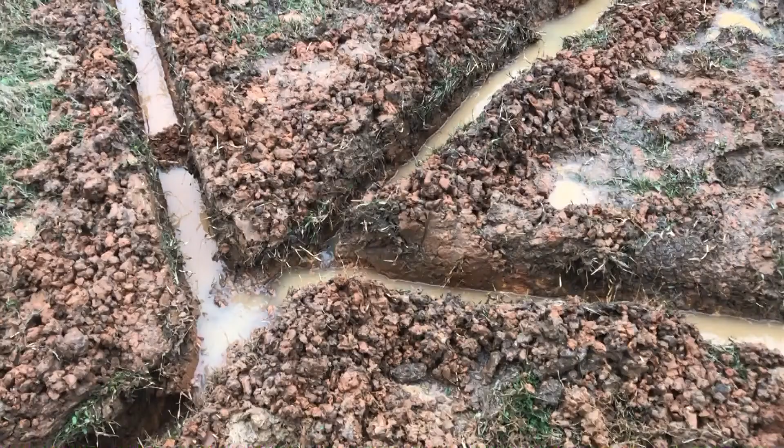Well, it's still raining. You see the water in there now? So the French drain is actually working.

Hey, welcome back to Page DIY. This is the second video in my series of 4 on water remediation, how to keep water out of your house, and how to move the water to where it belongs.

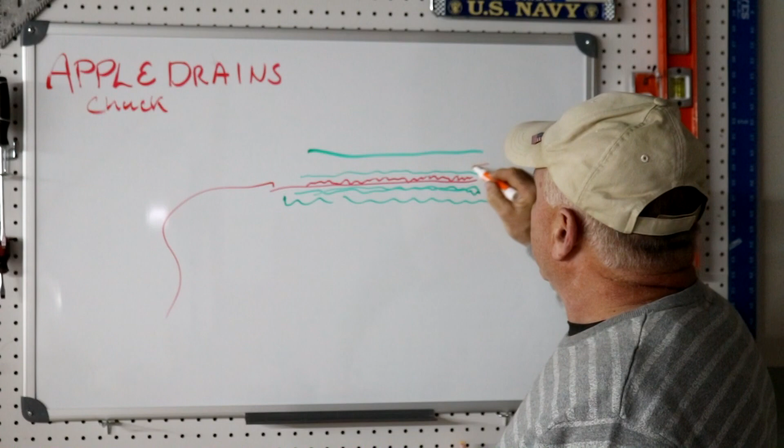In the video I struggle with trying to figure out what it's made of. I looked it up. It's not PVC, it's not ABS, even though it's black. It's PE, polyethylene. And this pipe has holes in it. So water comes up through the gravel and into the holes on the bottom of this pipe.

This pipe will be marked. And you want to make sure that the marking, a green or a blue line, is facing up. And that'll put the holes in this corrugated pipe that are designed to collect this groundwater on the bottom of the trench on that bed of gravel. It's starting to look pretty complicated, but I assure you it's not.

So after you put the gravel in, you put the pipe in, you can cover the trench back up. You want some gravel around the sides of the pipe, because most of the pipes I've found had holes on the sides as well. Now you might say, how does it work if it's got holes in the pipe? We're working on this hydraulic pressure, the groundwater coming up into this thing.

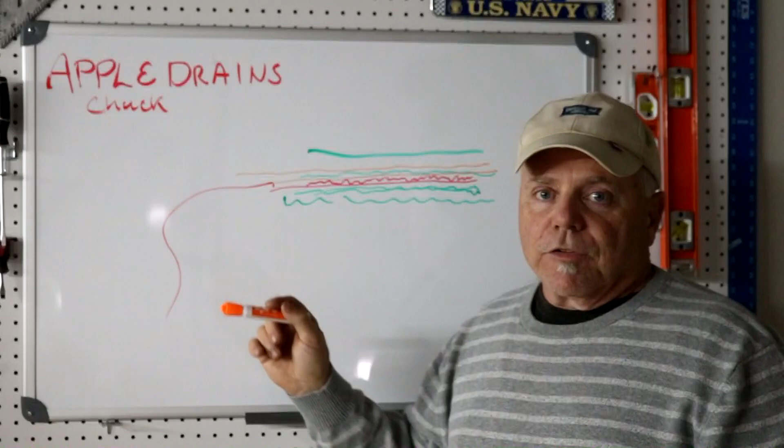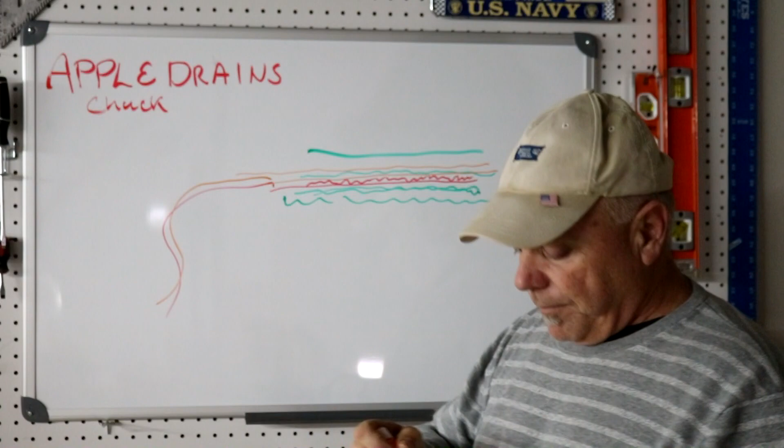It wants to take the path of least resistance, and we're going to offer it that in this nice trench, through the gravel, into the pipe, and from there out to wherever you're going to drain it. But that is the basics of a French drain. Let me recap.

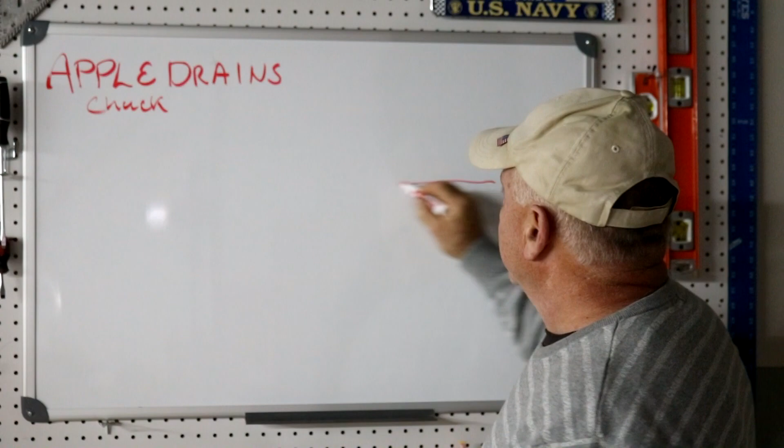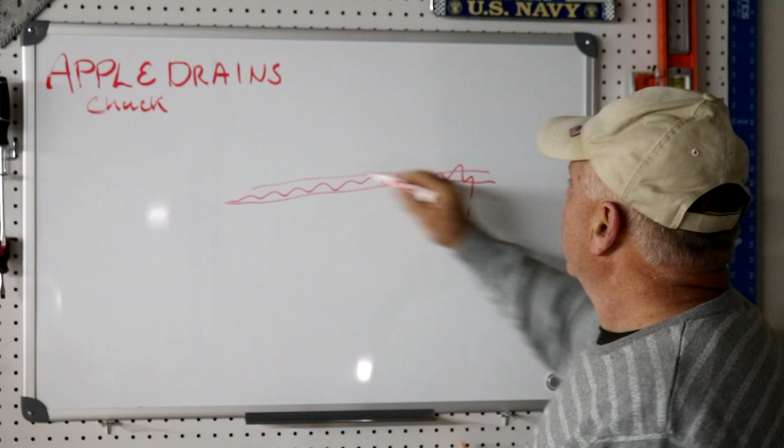Dig a trench that's graded off to the direction you want to run the water. Groundwater comes up into it, on the bed of gravel into the corrugated pipe, and runs away. It's all gravity fed.

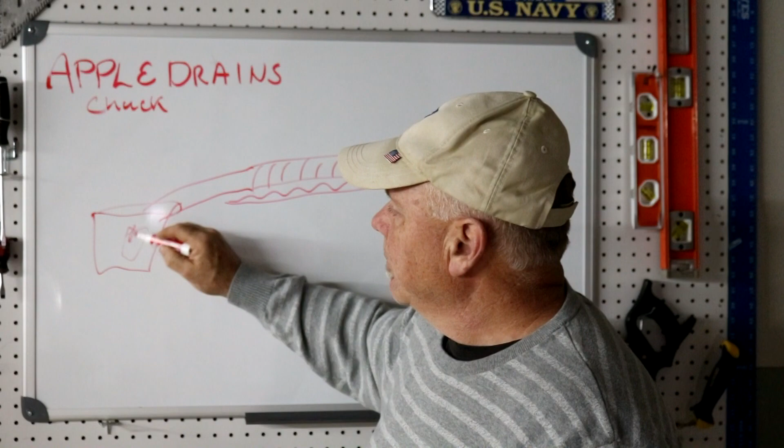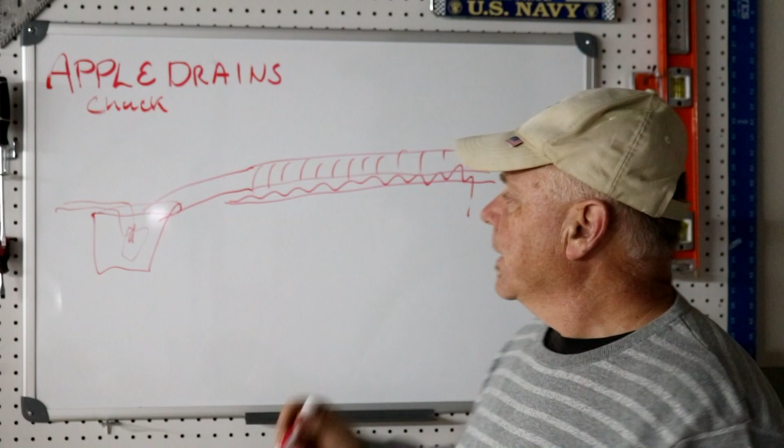Now, you can actually run it into a sump, which is basically a big bucket, a collection system, and you can put a pump in here to pump the water up and out. If you don't have the slope, you've got to have some slope for this gravity fed drainage bed to work, but once it gets here to a low spot, you can pump it wherever it needs to go. That is a French drain. You'll see it in the video.

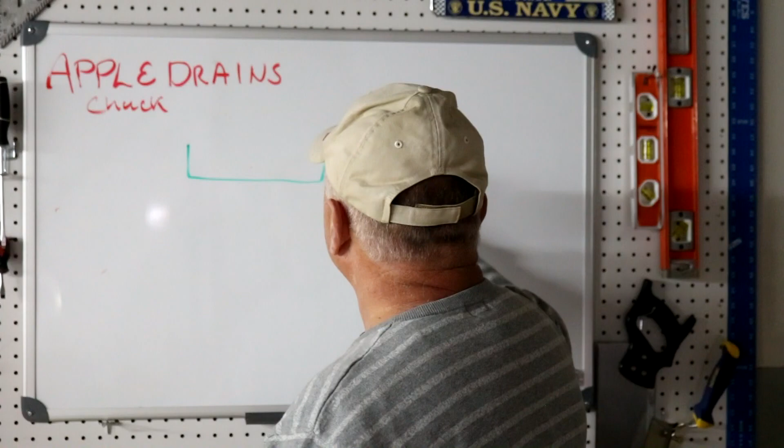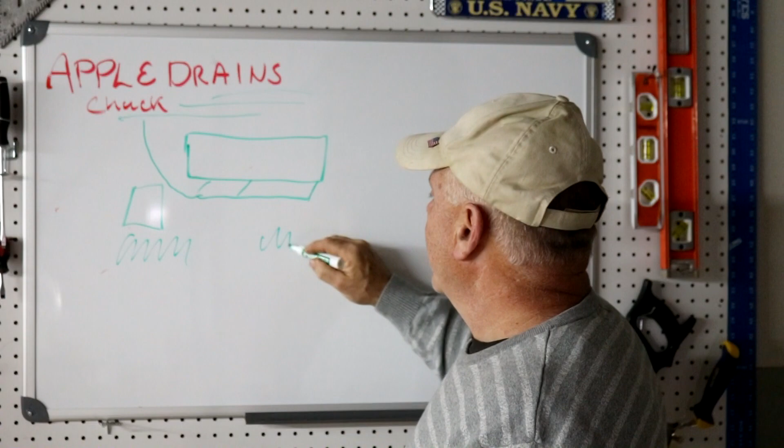My drainage system looks like this. Here's the house, here's the storage shed you'll see in the video, and here's where we ran our downspouts from and hooked them to this piece of pipe. Now this is just 4-inch PVC as I described in the video, and it runs out here to the street. And we had really bad water here that stood in the yard after we get lots and lots of rain.

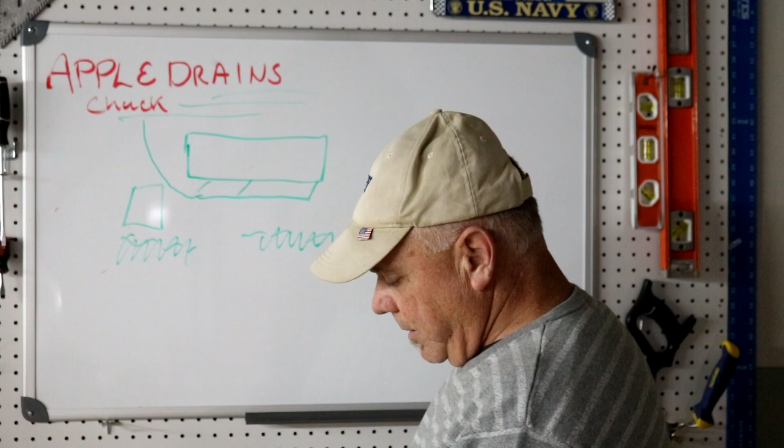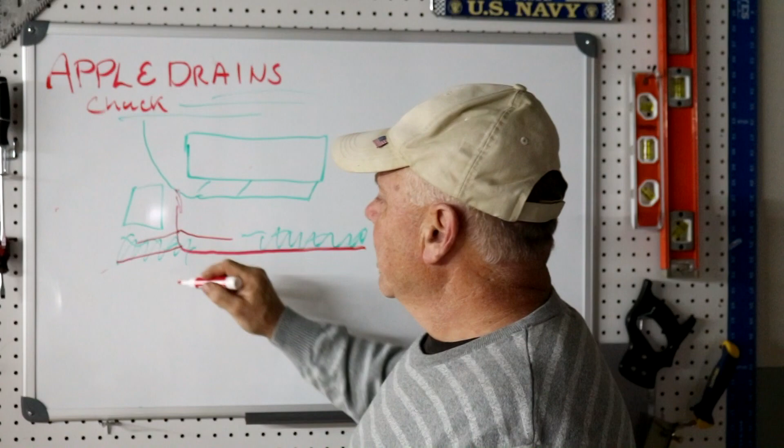So my French drain system starts out here and goes to here and turns down, connects to this pipe, but then I added another French drain here to catch the water. I added a second here and a third here. Actually, it's four. 1, 2, 3, 4. 4 pieces of French drain that are designed to take the water out of these low-lying areas that stayed wet all the time. I call these the chevrons. Kind of looks like it, anyway.

So this is the system. And you saw in the clip, the intro that I did, it works. That was just the trenches dug, and you saw them running. You can hear the water running through this system, but it's not aesthetically pleasing, so we need to pretty it up a little bit. And so that's why we backfill these trenches. Once we get the pipe system built, we backfill it, and you can sow the grass back.

So the components for this system, you can get at Lowe's and Home Depot. When you go to the quarry or buy the rock, you want 3/4 inch rock. It's a number 57 stone if you get it from a quarry, and it's about 3/4 inches in diameter. That is what we're doing. Check out this video.

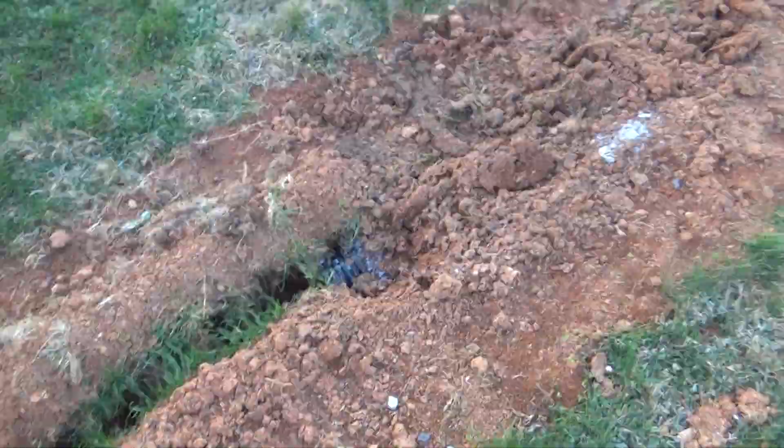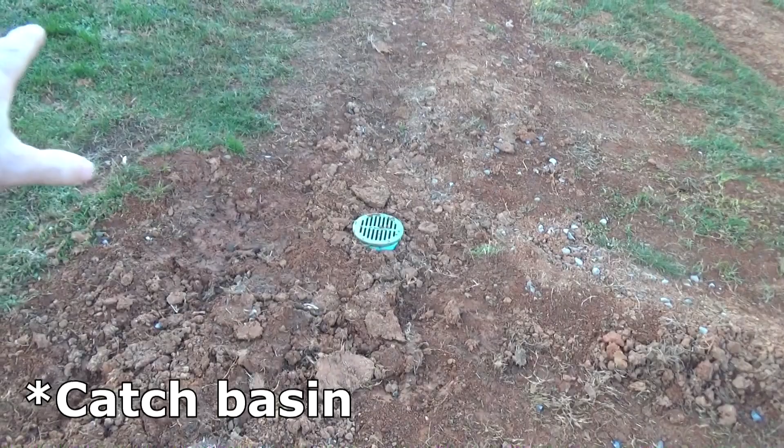So let me give you a quick update where we stand. So this is where I ended the pipe. I've got a little bit more to go. It's probably about 40 feet. And then I will have all the drains in. As you recall, I put in, let's see if I can get a shot of this, 2 of the chevrons, as I call them, over here, and then connected to this long drain. I've got a drain there to collect the rainwater that comes down on the surface, and of course that's got to be cut to grade. It's just in there for now.

This is the main trunk line, and it runs down here where I'm going to run this down to the street. And that was a big job, biggest home improvement job that I've ever tackled.

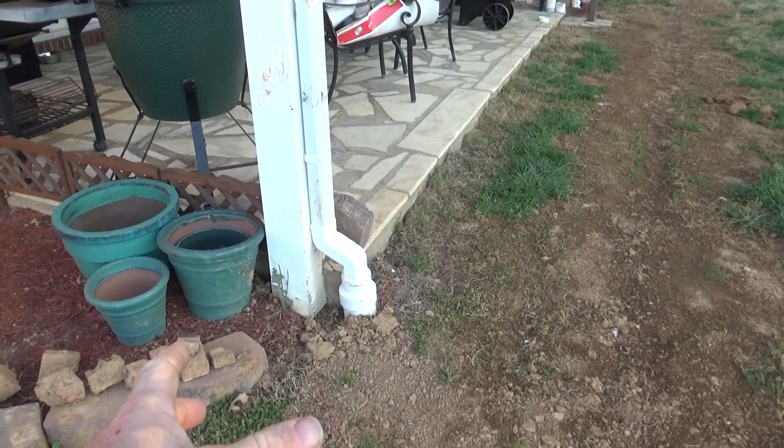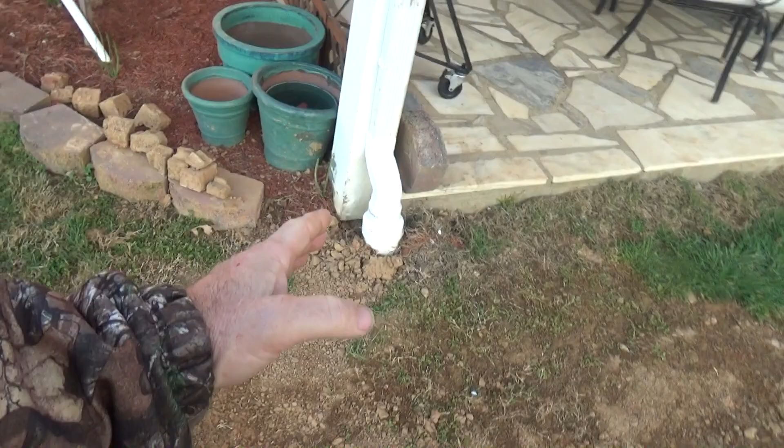Here are the downspouts. I looked and looked and looked, tried to come up with some way that was aesthetically pleasing to run the downspouts into our system in the ground. As you recall, we ran a Y pipe over here to this trench, and we were at Lowe's, and this is a 4-to-3 adapter sitting on top of the pipe.

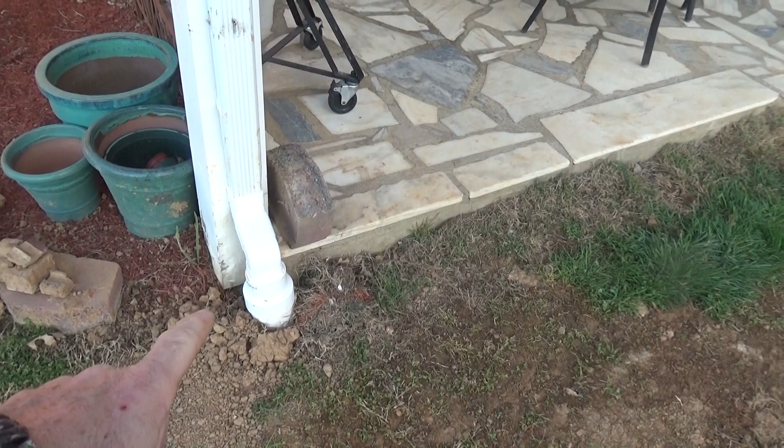Now this joint, other than the silicone that I sealed it with, is not glued. So weed eat, hit it with the mower, bust it, whatever. Of course it's Schedule 40 PVC, not thin wall, so it should take a lot of abuse. But it's not glued, so I can take the downspout off, pop that loose, and replace it without too much trouble.

And over here, this is going to be a flower bed right here. I'm going to continue this on around, and this is a 4-to-3 reducer, very low profile. And if I didn't already have that pipe in the ground over there, I would have used one of those over there. So there it is, all caulked up and in the ground.

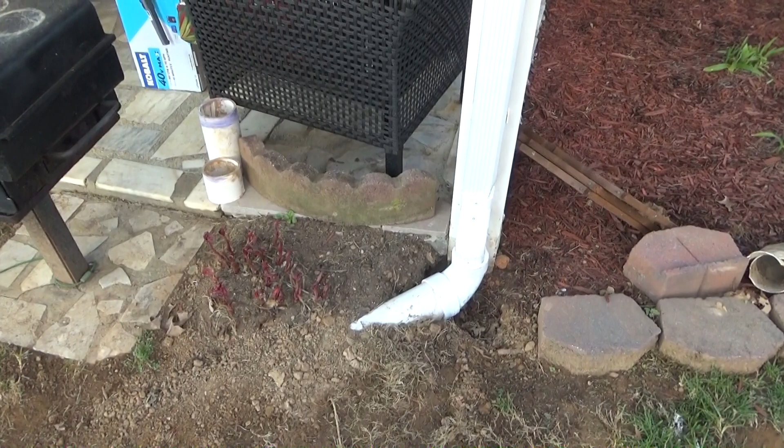And that's our update. 90% of the outside work is done. It won't take but an hour or two to finish this trench. And then we're going to be done with this project.

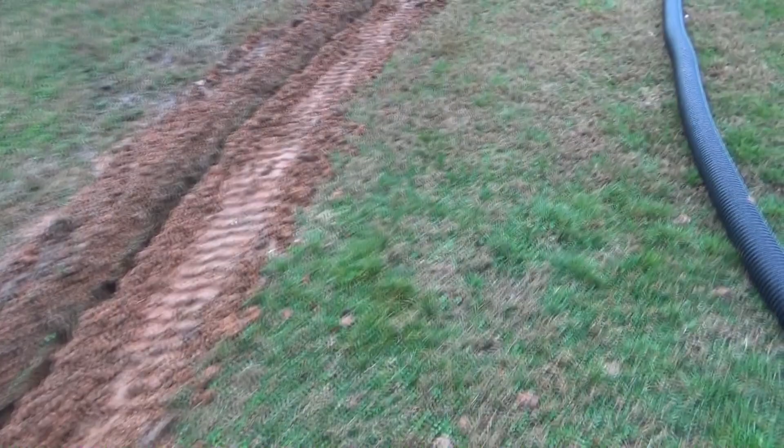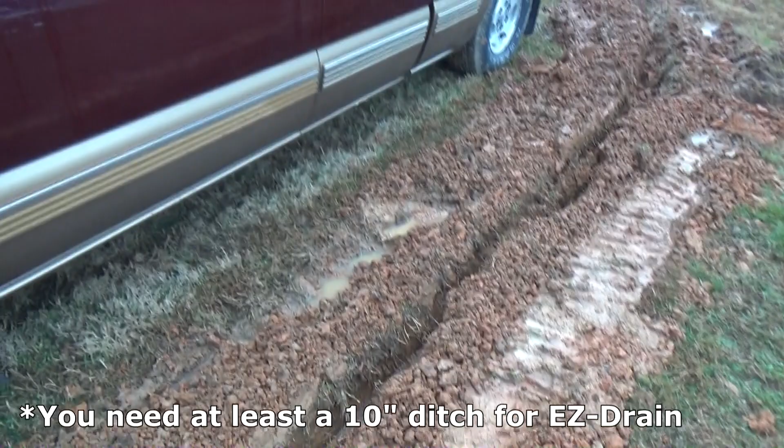And I had the sock pipe all laid out. Then I realized that whatever machine I could get to dig a 10-inch wide hole, I couldn't haul on my truck. So I ended up using a Ditch Witch and digging it out by hand.

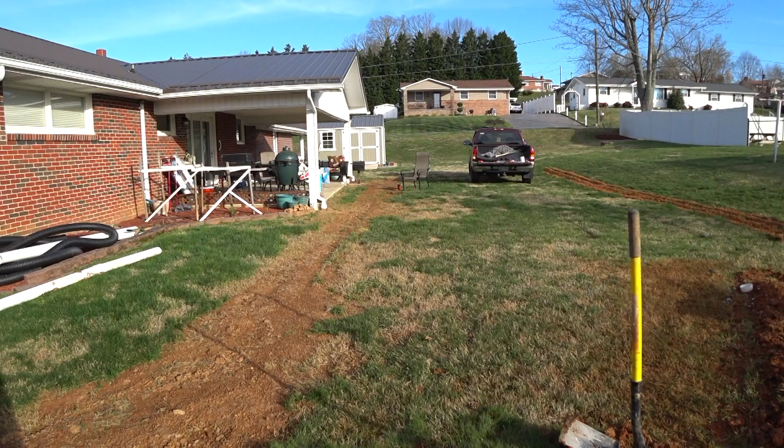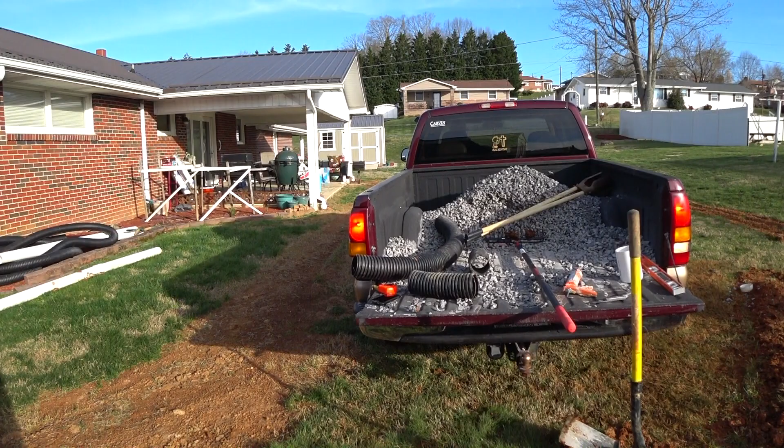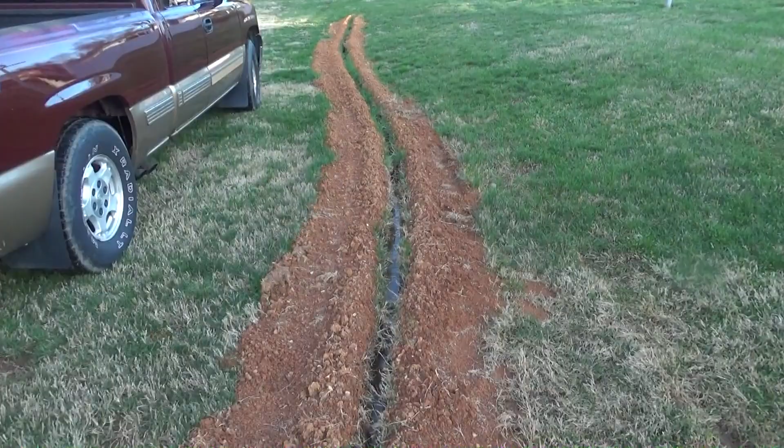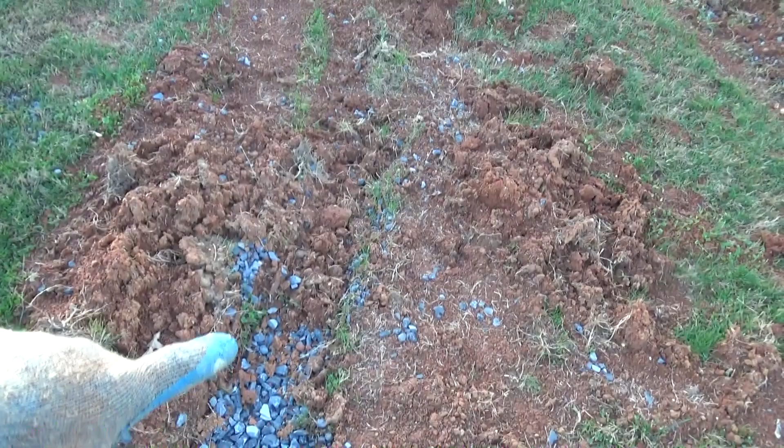And I've got one line that goes right up here, and that's to catch the water from this slope up here. And I added a second line just in case. And these are all buried, or mostly buried. And then they come in from this T into this main trunk, which goes down here to what I call the chevrons. One runs this way and the other runs that way.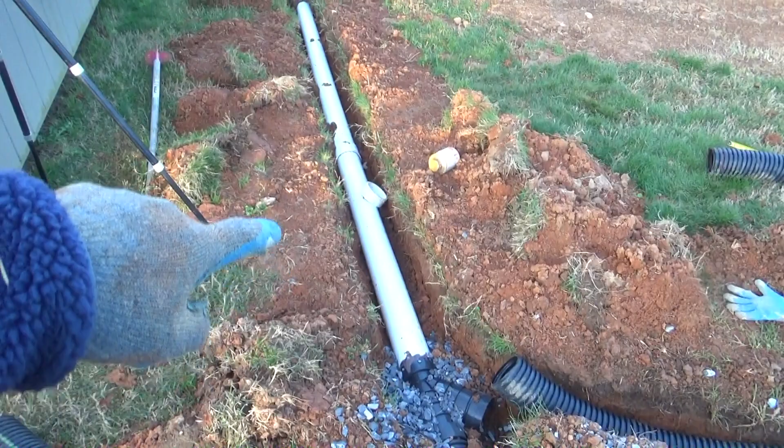And I noticed something the last rain we had. This trench is still running water around that pipe. So I'm going to go ahead and add some more of this corrugated pipe and gravel. Here I'm going to replace this section of PVC and see if I can't collect even more water.

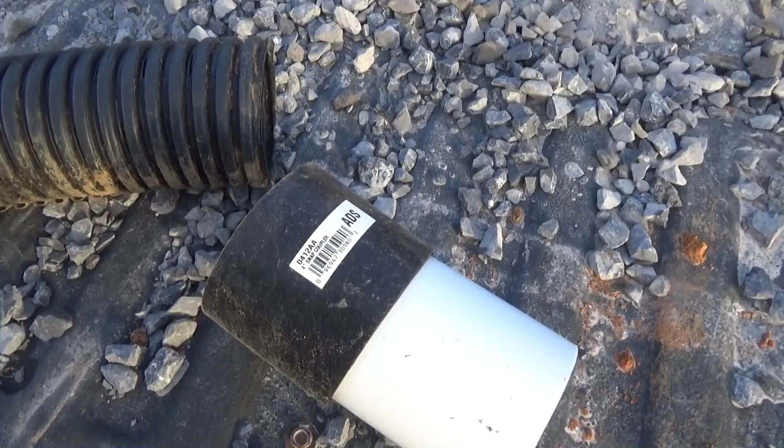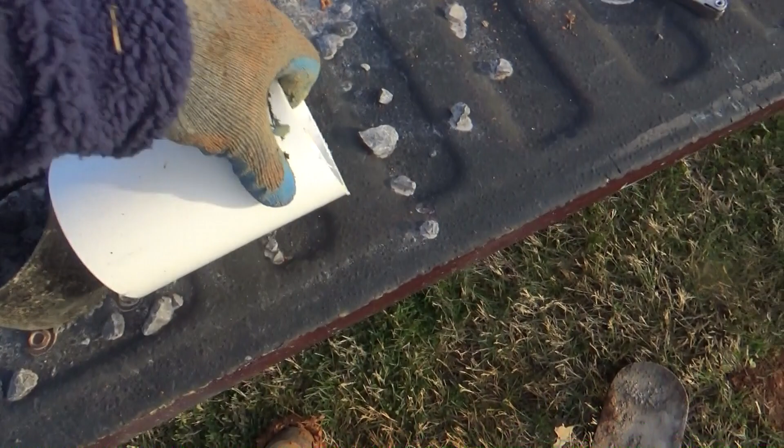Let me show you briefly how we're going to connect these pipes when I replace the PVC. The first way is with a coupler. Now this coupler is actually designed to couple two pieces of corrugated pipe, but 4-inch PVC will fit inside there. It's not a real tight connection, so I always silicone it.

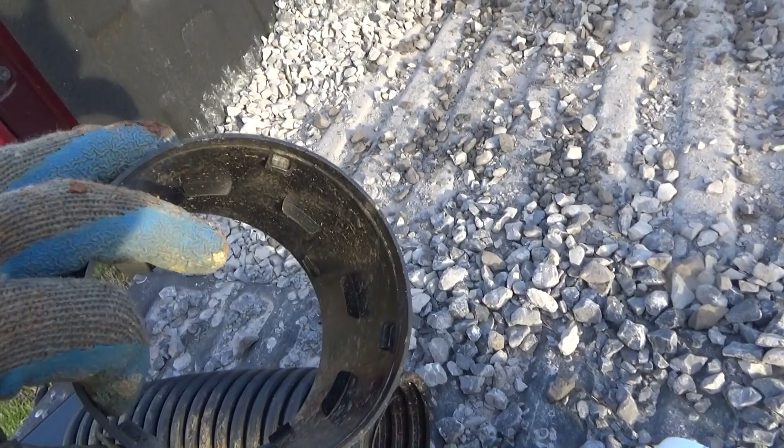The other end of it is going to go on this pipe, and this thing has teeth in it. Hope you can see that. They grab onto the corrugated sections of the pipe. I said I was going to use silicone to seal the inside of this thing. Don't be bashful with it. Let's go on and get some on there. If we're going to do it, let's do it right.

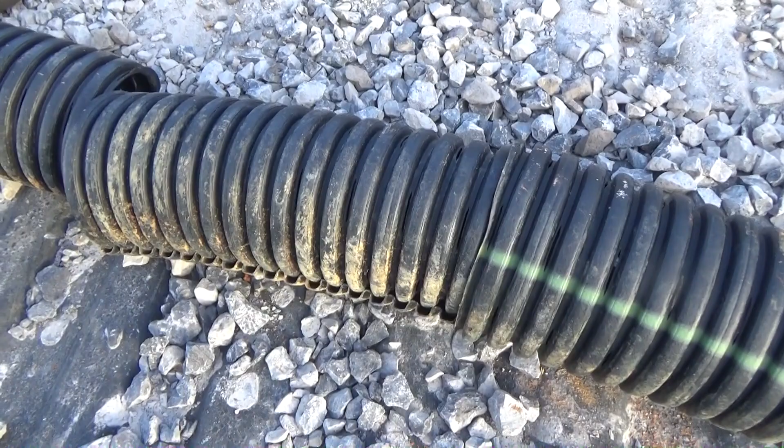You can take a piece of corrugated and split it. This stuff cuts like butter. Any kind of blade will do. And you take one end and stick it in there, and then take the other end and stick it in there. Push these two pieces together, and there's you a homemade corrugated pipe joint.

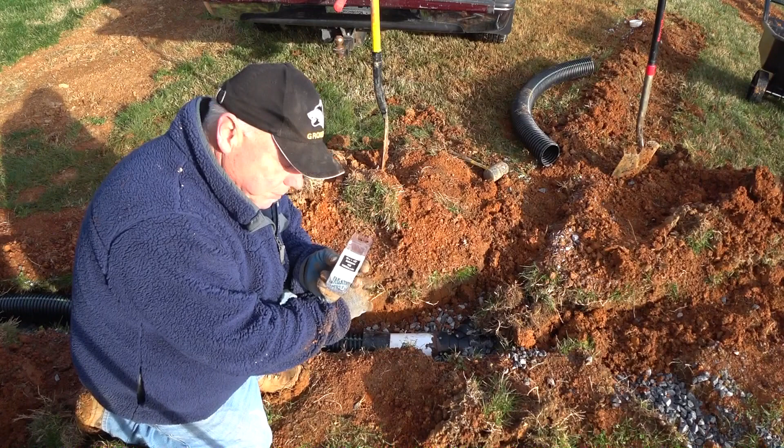So these are galvanized gutter screws. I'm going to use these to pin these pieces of pipe together, the PVC to the ABS. Well, that's probably PVC too. Anyway, I'm going to glue it and screw it.

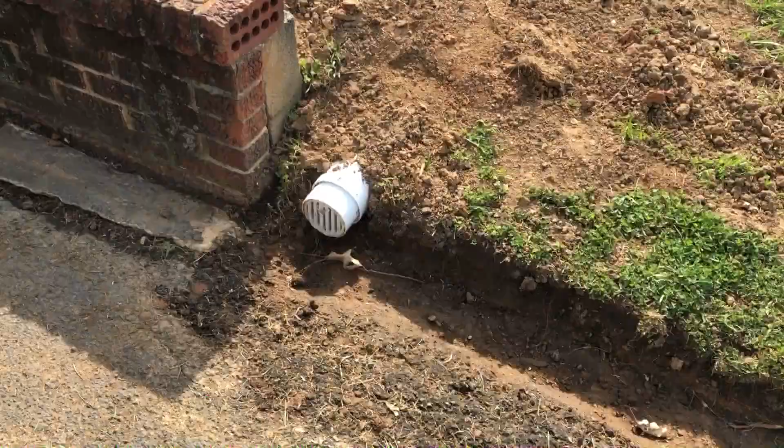And so here's a view from the front of the house. There's our trench that comes down through here, and it turns out right here, and I put a mesh over it, and that's where the water comes out. I was going to run it all the way to the road, but then I realized that that's a really good depression for this to run in. So I was just trimming the grass back that had grown out onto the driveway, and it left a really nice depression there to carry this water down into the street. So that's the end of the line.

Like I said on the video, this was a big job. It's the biggest DIY project I've taken on. The cost was, like I said earlier, between $300 and $500 just for the materials. But if I had had someone do this, we're talking, I don't know, $5,000, $6,000, $8,000 maybe, because this is very, very labor intensive, and labor is expensive.